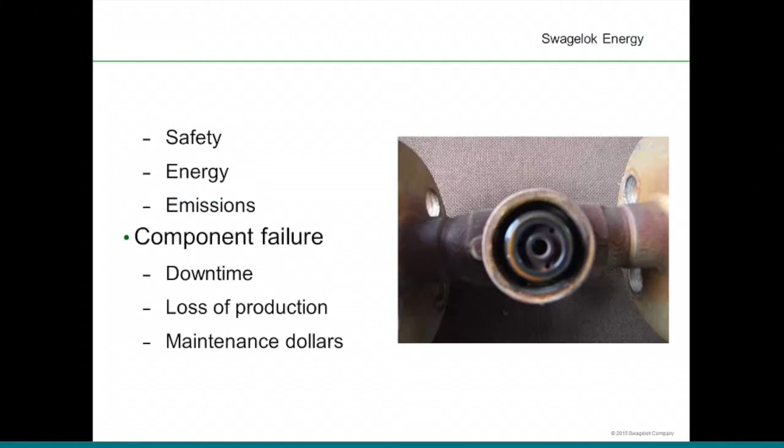The reliability areas I'm going to be talking about are number one, steam leakage, and two, component failure. Steam leakage relates to safety, energy, and emissions. When we talk about leakage, people always think of it as just energy, but it's more of a safety item. The other thing I want to talk about today is component failure, downtime, loss of production, and maintenance dollars.

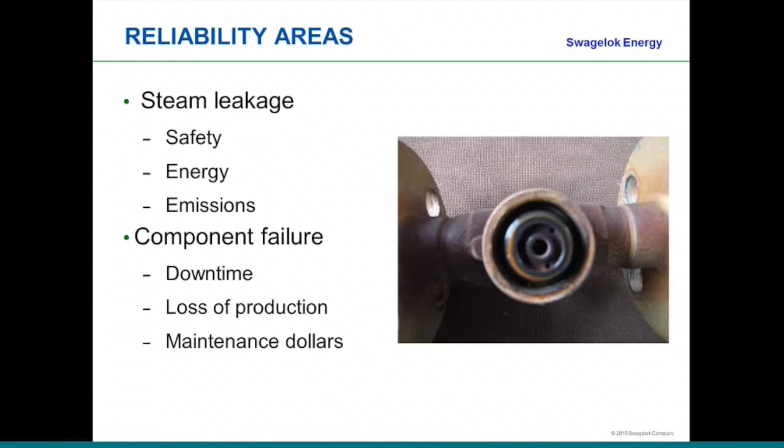Everything that we put into the steam system today must last 6 years. But in order to achieve that 6-year reliability, a number of things must occur. The biggest thing of any reliability program, the most important thing, is change. Things must change. The way we did it 10 years, 15 years, even 5 years ago is not how we can do it today. We must demand reliability of all components that we put into the steam system. In order to do that, a number of things have to change.

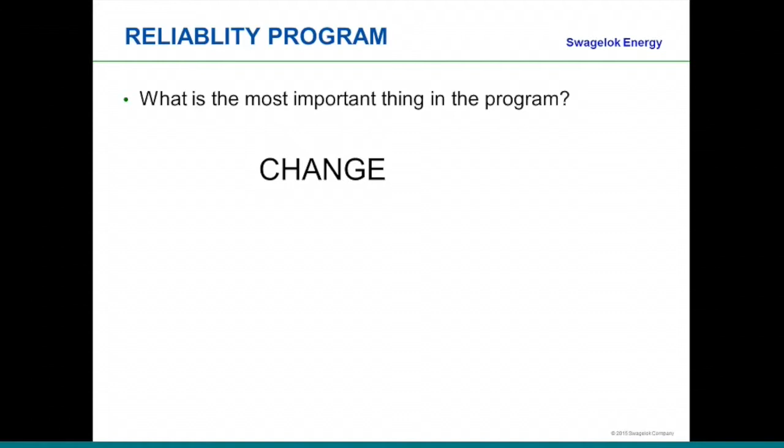So if you're ready to have change, then things will dramatically improve in the steam system. One area is steam leakage. Steam leakage has a negative effect on steam plant operation: number one, safety, energy losses, and increased emissions.

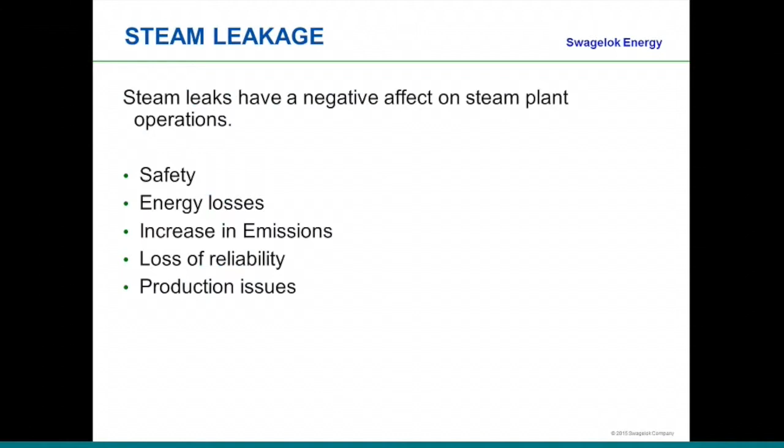One of the things people forget about is emissions. So if I go out and fix a steam leak, how many tons of CO2 will I stop putting up into the air? The other thing is also loss of reliability, and steam leakage causes production issues. So those are some of the areas we want to take a look at.

Energy losses. Yes, energy losses can be as high as 19%, or even higher in a few cases, of the total steam energy production costs. In doing analysis for steam leakage in plants, unfortunately we've seen over and over again as much as 19% of the energy produced is lost through steam leakage. So if I had a $1 million fuel budget, 19% would be contributed to $190,000 in energy losses. A tremendous amount of energy to be lost.

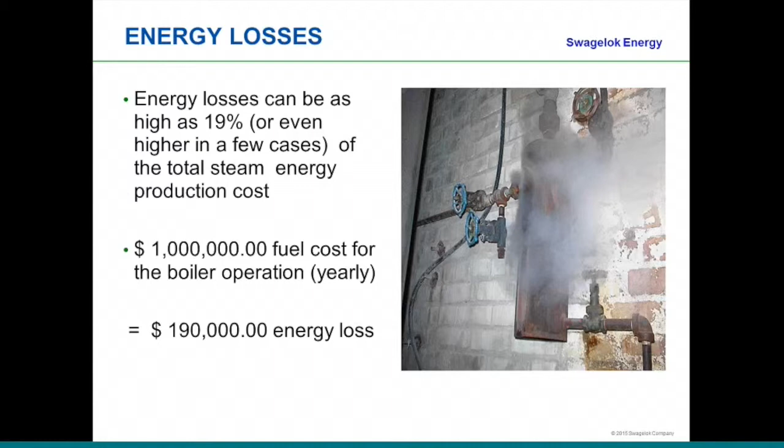The greatest payback of all items in the steam system is steam leakage correction. We talk about doing this or that in the steam system to improve or optimize the steam system thermal cycle efficiency. One of the biggest and greatest paybacks is steam leakage, greater than steam trap repair or replacement.

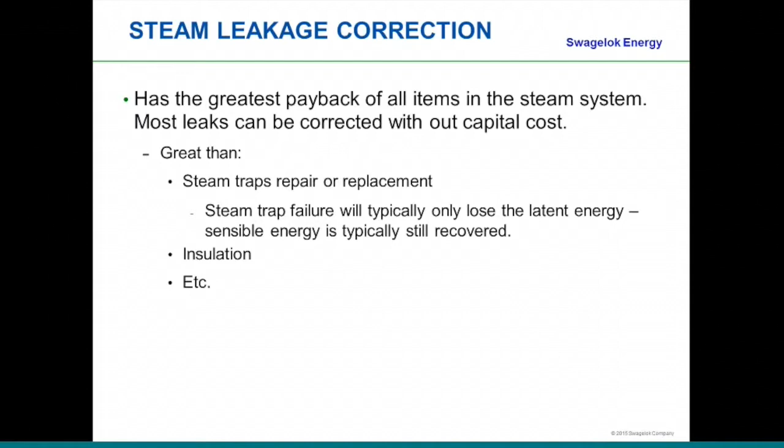People always say, oh, go out there and correct the steam trap failures, it'll save you all this money. Steam leakage is far, far higher payback than steam traps, insulation, or et cetera. So if you're looking to optimize the steam system, steam leakage is the number one, or maybe even number two, area that you want to take a look at.

Steam leakage versus compressed air leakage. A steam leak on a yearly basis would cost $3,591 at 100 psig, and that's a 1/8 inch leak, based on $10 per 1,000 pounds. Steam leakage represents an immediate savings.

Compressed air leak would cost $2,095 at 100 psi, 1/8 inch leak, based at 0.05 per kWh. Now the thing about that is a steam leak, if it's corrected immediately, is an immediate savings, whereas with compressed air, if you go out and fix the leak, really the savings come when you find enough leakage to remove an air compressor from operation, and then you get the bulk of the savings. Just going out and finding an air leak and correcting it without shutting an air compressor down and achieving the electrical savings, there's not much savings there.

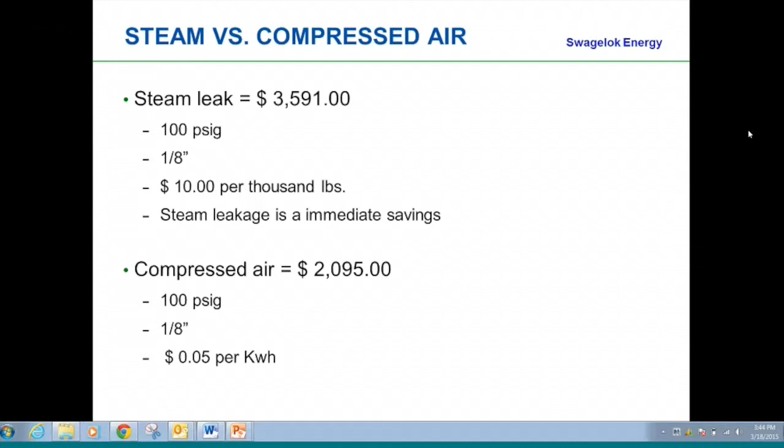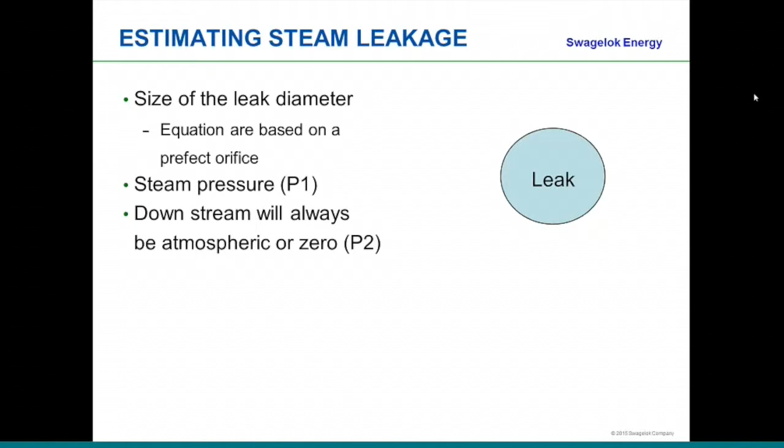So steam leakage is immediate savings. Estimating steam leakage is difficult. You need to know the size of the leak diameter, and of course with steam it's very difficult to tell the leak diameter. The other thing is all equations are based on a perfect orifice, with P1 being the operating pressure and P2 being atmosphere, the downstream pressure. But it's not a perfect orifice—leakage is a crack on a piece of steam piping, a flanged leak, or a thread leak. It's not a perfect diameter. Therefore, we use different types of equations to come up with the estimated steam leakage or cost.

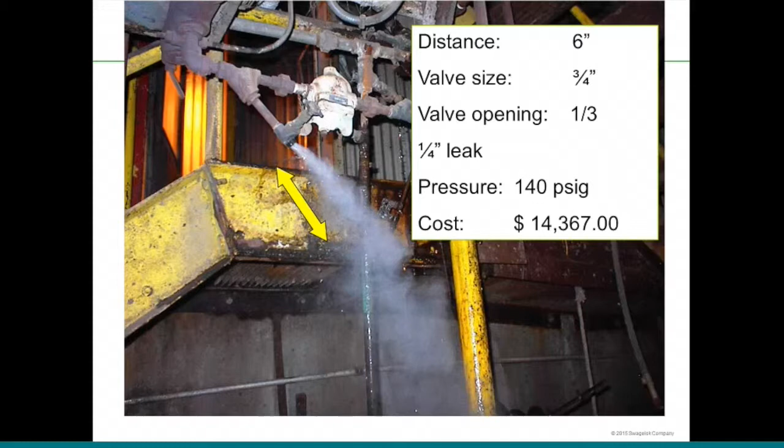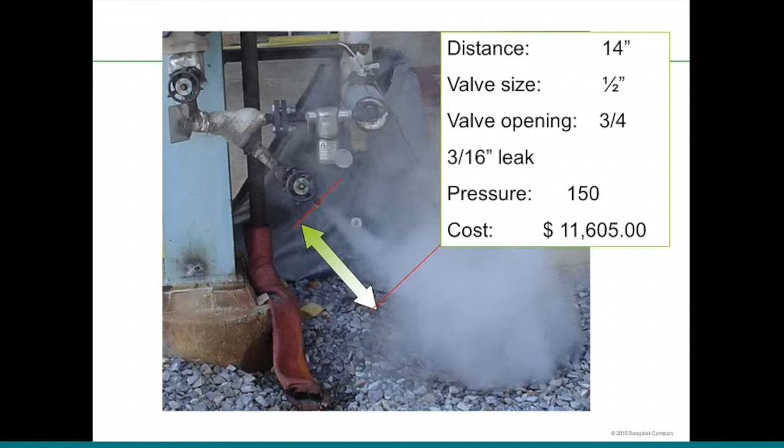Another one we find a lot in steam leakage is valve failure. The distance was measured out to be 14 inches, valve size 1/2 inch, valve opening was 3/4 way open, and a 3/16-inch leak was estimated at 150 psi. Cost was about $11,605. So just on 2 applications, you see the savings is about $20,000, which again is immediate savings.

Another leak, 40 inches in length. Leak was 3/16 inch at 250 psi, costing $18,651. The thing about steam leakage is the leak is this diameter today, but it will increase day after day because steam will wire draw the pipe leak point and increase in diameter.

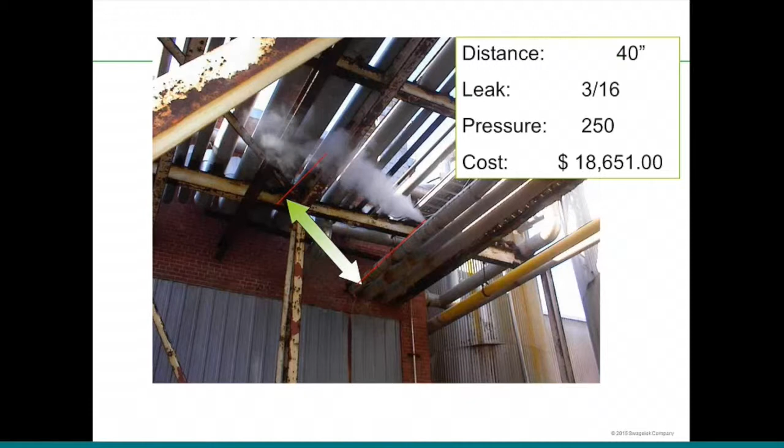So the thing about steam leakage, you have to be extremely proactive. We cannot tolerate steam leakage in a plant operation.

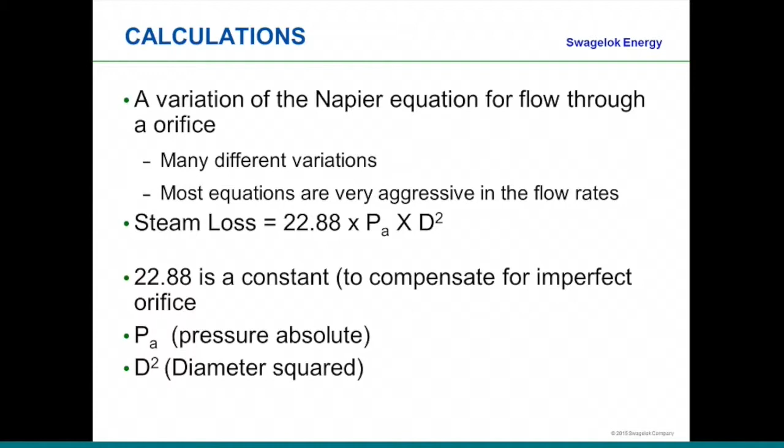The calculation uses a variation of Napier's equation for flow through an orifice; there are many different variations, and most equations are very aggressive for flow rates. The steam loss equation we typically use is 22.88 times pressure absolute times diameter squared. The 22.88 is a constant to compensate for the imperfect orifice. No matter how you do it, the steam loss is estimated because the orifice is not perfect, so you cannot use P1 and P2 in the equation. Anyway, this turns out to be a pretty conservative estimator for steam leakage.

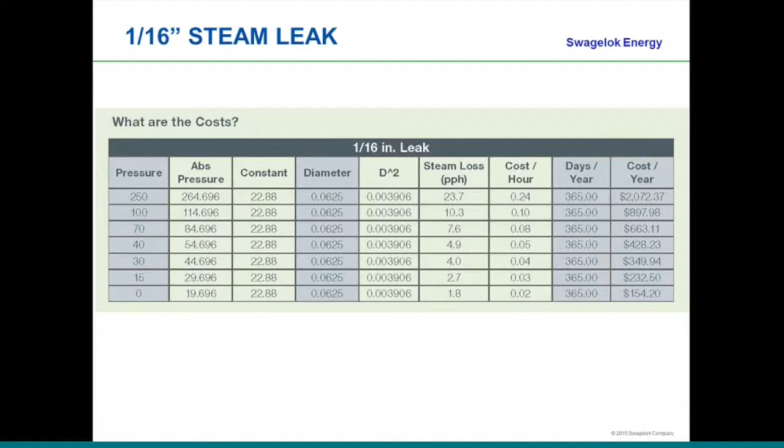If we take a look at this chart, there's a 1/16 inch leak at 100 psi. The steam loss, energy loss per year, is going to be $897. At 250 psi, it's $2,000. If I go up to a 1/8 inch leak at 100 psi, it's $3,591 per year. Also, part of these calculations is the emissions - how much emissions will be saved or stopped if I go out and fix the steam leaks.

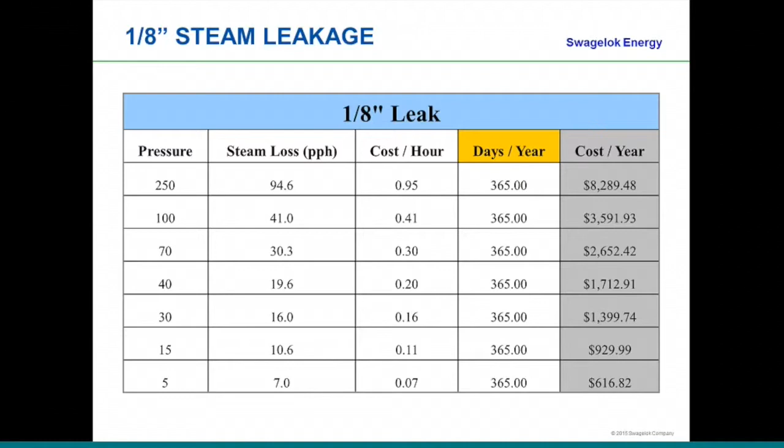Here is a chart I pulled from the EPA, and I have a lot of information from the EPA on CO2, NOx, SO2, mercury, and other emissions driven from the fuels being burnt in the boilers that generate the steam. So if I was burning coal, the factor for CO2 per million BTUs is 205 pounds. If I was burning natural gas, it would be 117 pounds of CO2.

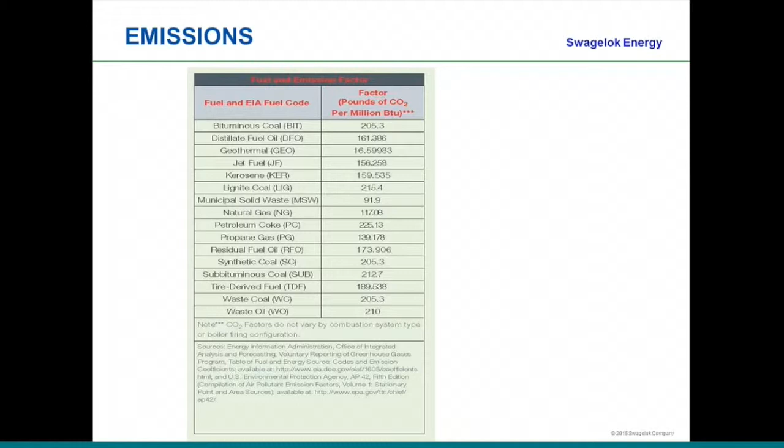So the thing about that is that by going out and fixing leakage, we reduce the emissions that we're putting up into the atmosphere. A lot of projects in recent years have been totally for optimization on emission reduction, because the plants are in a non-attainment area and they need to reduce the emissions. So safety, emissions, and energy all play into correcting steam leakage.

One of the things you always have to ask yourself is what causes steam leakage. Number one, corrosion, CO2 or oxygen corrosion. In the steam system, we always blame CO2, carbonic acid, for causing all the leaks in the steam system. But don't forget about oxygen corrosion.

On root cause analysis and any correction, part of your change is a very aggressive root cause analysis program to understand what caused the failure. So doing root cause analysis, you will find that CO2 corrosion is sometimes there, but oxygen corrosion is probably going to be a more dominant player in causing steam leakage. So you must look at oxygen corrosion.

Installations - the thing with this is that you want to stop steam leaks, stop threading pipe. One of the weakest parts of the piping system in steam or condensate is the threads, and the first place that corrosion is going to attack is the threaded connections. So today, installations in steam or condensate, we don't thread pipe - everything is welded, flanged, or tube connectors.

Component selection - what are the components we're using? Still today, a lot of people are using the same standard packed valves for steam. The last great revolution we had on packed valves was 1941. So the other weak point in valving, besides the threaded connections, is the packing. So you want to look at your component selection, going away from standard packed valves to other types of valves that we have available today in the steam system.

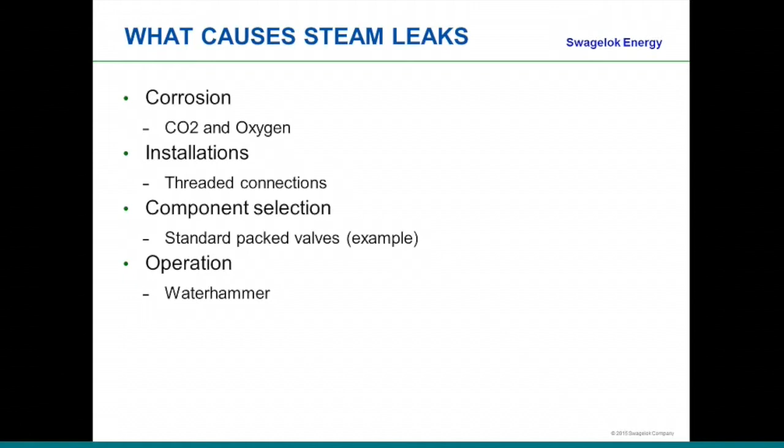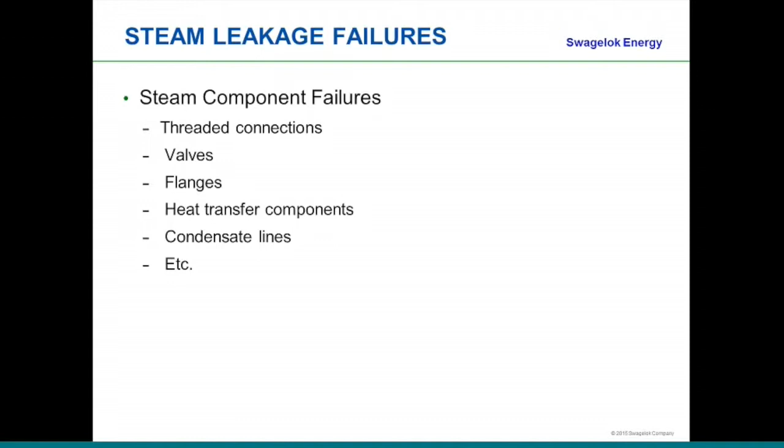So steam leakage we must correct.

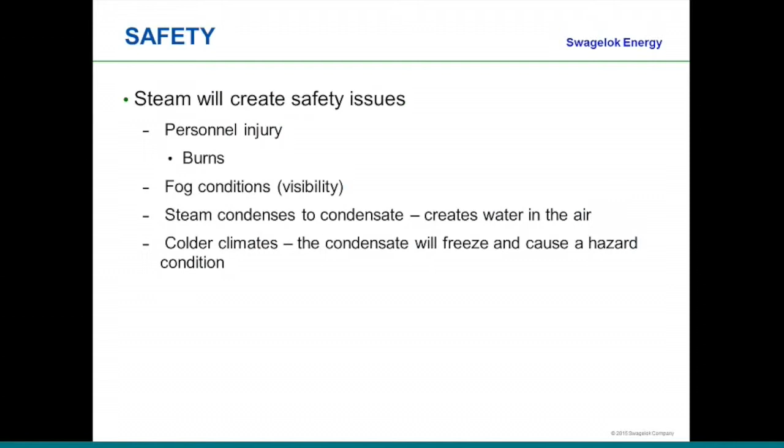I'm quite serious that no plant should have more than 6 leak points per year for steam leakage. We have the technology and the way to stop steam leakage.

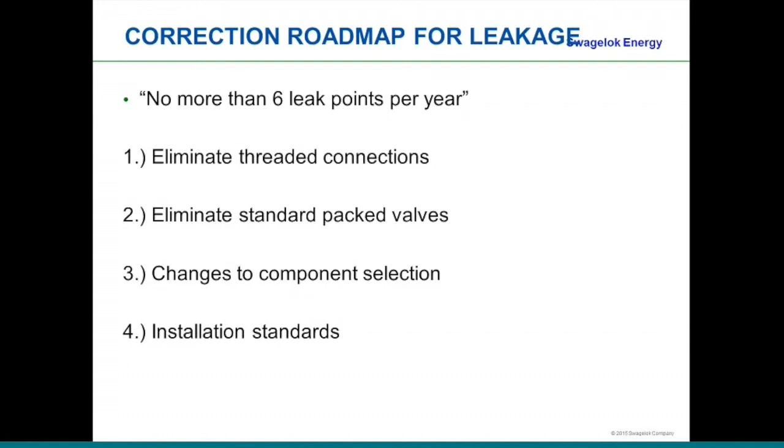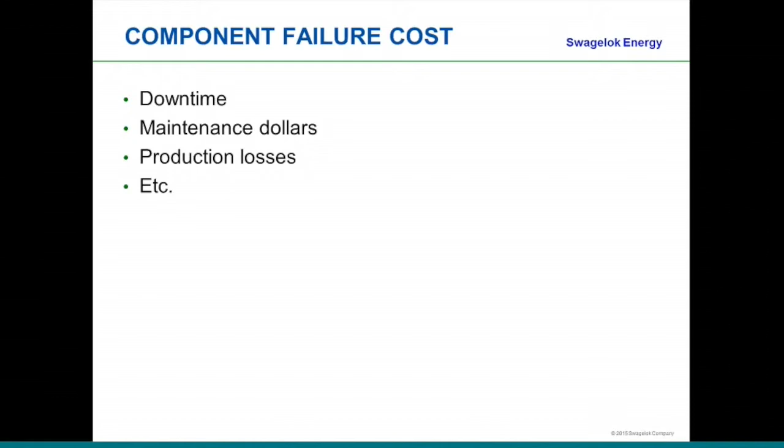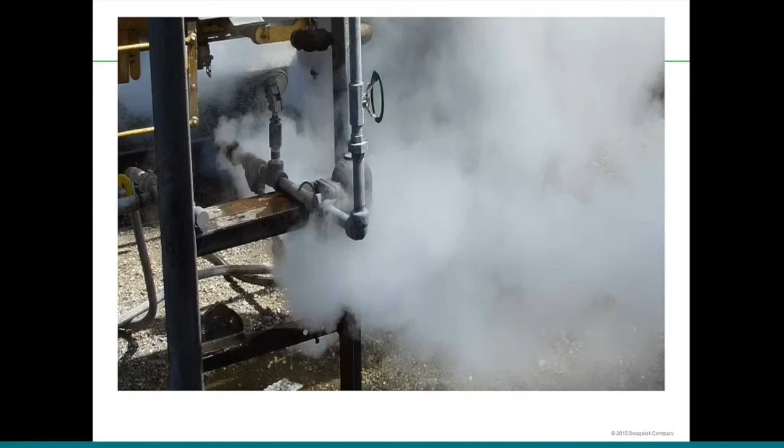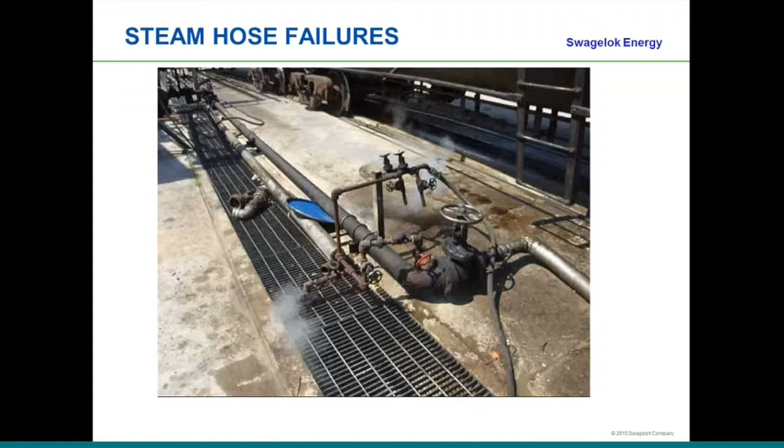Another example of component failure is a tracing system: a valve gives way, steam blows out, causing a pressure drop. When you drop in pressure on steam, you also drop in temperature. When you drop in temperature on a tracer, you will cause production transfer issues. Again, the result is downtime. The thing we can least afford is downtime. Component failure plays a critical part in production and eliminating downtime.

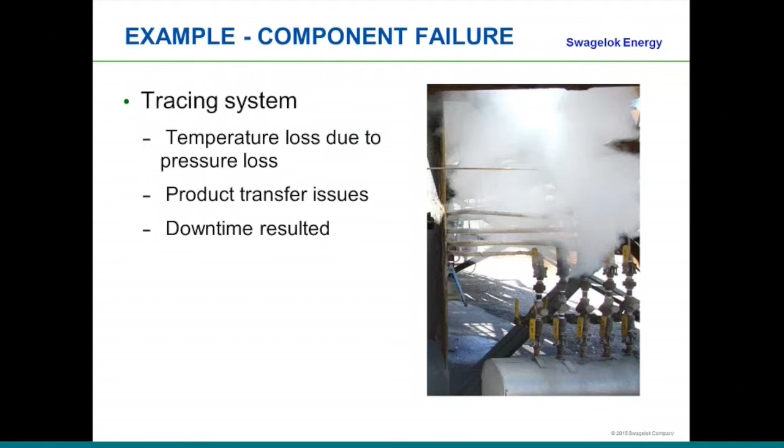Valves, standard packed valves, threaded connections, internal leakage. The thing with component failures on a steam valve is we buy valves that already leak. You must buy valves that don't leak. The valve leakage rate is per FCI, ANSI, or API standard. So when buying valves, make sure you buy valves that are class 4 or higher, that do not have a high internal leak rate. If you purchase a valve without specifying an internal leak rate, you get a valve that looks like this in the picture, steam coming out of it.

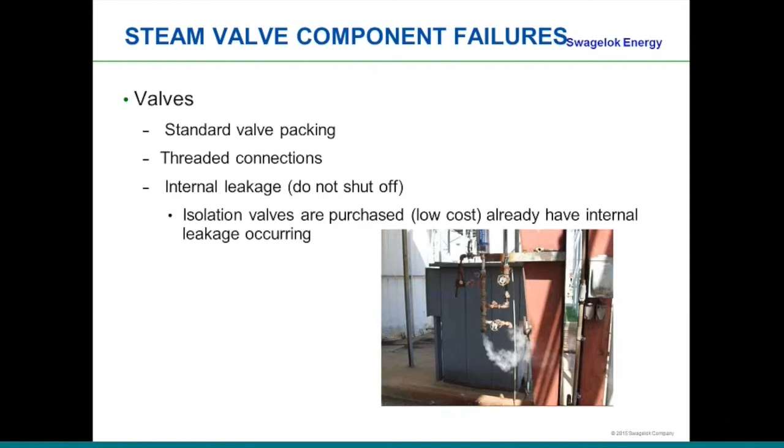Component failure also occurs in heat transfer tubes. We have tube failure, we're always plugging tubes. PRV valve failures - pressure reducing valves should have a minimum of 6 years operation without any problem. But you have to remember a pressure reducing valve will often go into critical operation. We must stop them from going into critical operation, and we must install correctly and select the components properly.

Control valves, again, installing control valves correctly, making the correct selection. Do I use a cage trim valve, or globe? What does the internal look like? How do I operate it, electric or pneumatic?

Heat transfer components - what type of service? Plate frames are used in certain types of services, and in certain services they should not be used. Like a steam coil - should I use copper tube or steel tube? For steam, you should use steel tube.

Expansion devices - having the device in the correct location, taking axial movement only, will prolong the life.

Turbine components: internal nozzles, buckets, blades, erosion, steam quality issues, cross component failures. Condensate pumps - without having NPSH, the pumps will cavitate, and then we switch to a steam motive pump, which gives us less reliable operation. Steam traps - a steam trap today under 250 psi should last you 15 years. You should not have component failures.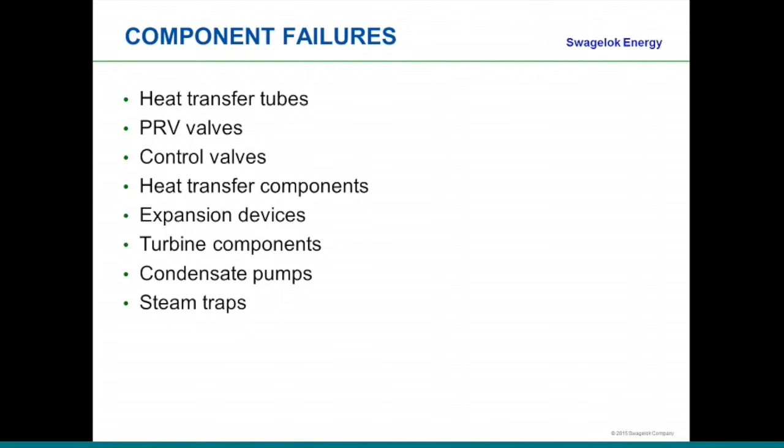The thing to increase reliability, number one, change must occur. I said this before. Change can be engineering specification, system design, product selection, installation standards, operations per SOP, standard operating procedures. So the change is not going to be just in one area - it's going to come from all different areas, even in maintenance of the product. So to increase reliability in the steam system, number one, change must occur.

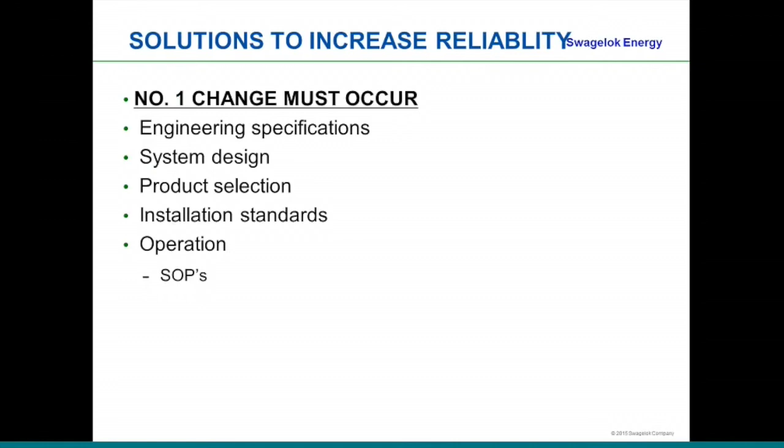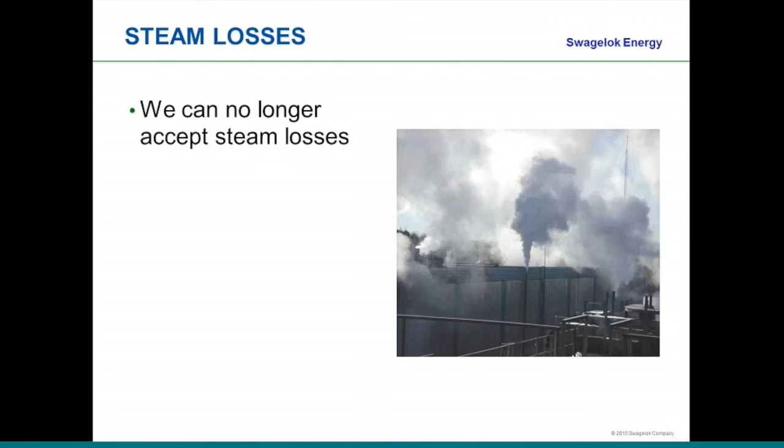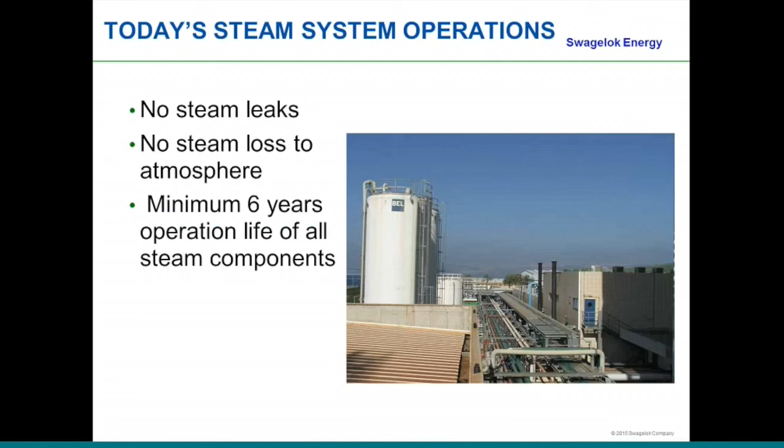The other thing I want to point out is steam losses, venting steam to atmosphere. We don't do that anymore, it costs too much money. The thing about optimization of the steam system, increasing reliability, is to stop venting steam to atmosphere - it's a major loss. So today what we want to see is no steam vents to atmosphere, no steam loss, no steam leaks, no steam losses to atmosphere, and a minimum of 6 years operation life for all steam components, which is extremely achievable, no problem.